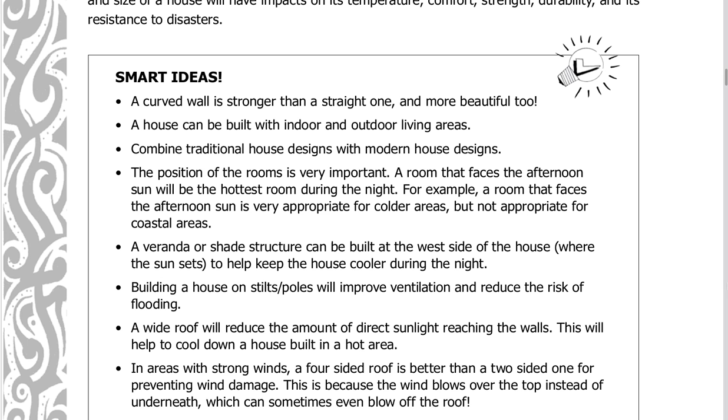Combine traditional house designs with modern house designs. The position of the rooms is very important. A room that faces the afternoon sun will be the hottest room during the night. For example, a room that faces the afternoon sun is very appropriate for colder areas, but not appropriate for coastal areas. A veranda or shade structure can be built at the west side of the house, where the sun sets, to help keep the house cooler during the night.

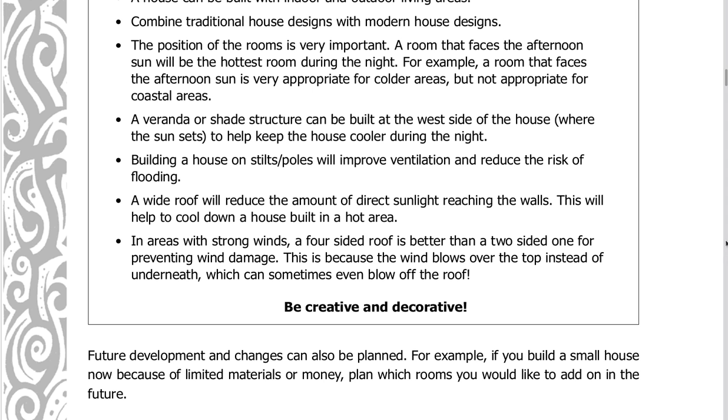Building a house on stilts, poles, will improve ventilation and reduce the risk of flooding. A wide roof will reduce the amount of direct sunlight reaching the walls. This will help to cool down a house built in a hot area. In areas with strong winds, a four-sided roof is better than a two-sided one for preventing wind damage. This is because the wind blows over the top instead of underneath, which can sometimes even blow off the roof.

Be creative and decorative. Future development and changes can also be planned. For example, if you build a small house now because of limited materials or money, plan which rooms you would like to add on in the future.

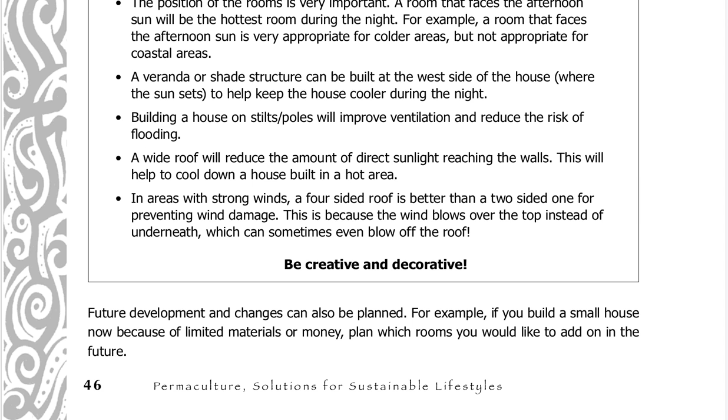Building materials. The most common building materials used are wood, plywood, bamboo, grass thatch, brick, cement, and tin. These are widely known and need no explanation of how to use them. Bamboo, clay, stone, and other traditional building materials have been used for a very long time and are good building materials if used properly. Some simple ideas and techniques on how to use them will be explained in this book.

Clay. If built properly, a clay, mud brick, or clay brick walled house can last for a very long time. In some countries, there are clay or mud brick houses that are 100 to 200 years old or more. There are many areas that have good clay for making mud bricks or building clay walls.

Clay houses stay much cooler in hot climates than do cement block houses, but good ventilation is still very important. Clay walls store heat throughout the day. At night, clay walls will slowly release this stored heat and help to keep the house warm. Clay houses are very suitable for areas that get colder at night.

Clay walls are made using clay, water, and some dry grass. Mix all the materials together, then start building at the base and slowly build up. Clay is more commonly used to make bricks.

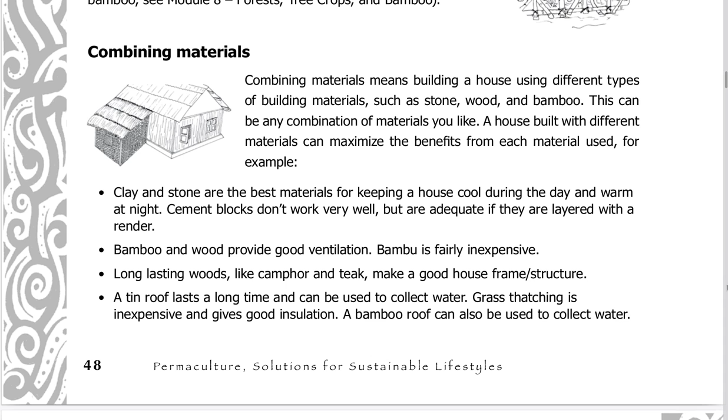Long-lasting woods, like camphor and teak, make a good house frame structure. A tin roof lasts a long time and can be used to collect water. Grass thatching is inexpensive and gives good insulation. A bamboo roof can also be used to collect water.

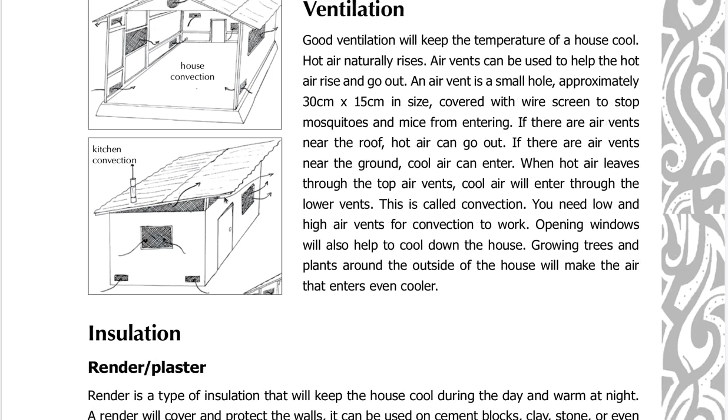Ideas for house improvement. See house convection, kitchen convection. These ideas can be used for building a new house or renovating an already existing house. Simple, inexpensive improvements can make a big difference to the living area.

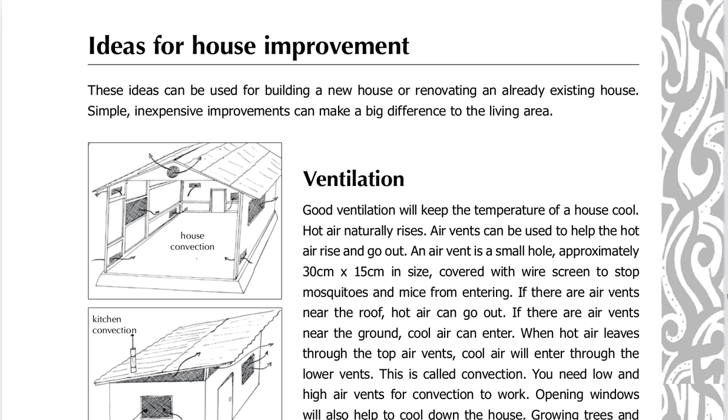Ventilation: good ventilation will keep the temperature of a house cool. Hot air naturally rises. Air vents can be used to help the hot air rise and go out. An air vent is a small hole, approximately 30 centimeters by 15 centimeters in size, covered with wire screen to stop mosquitoes and mice from entering.

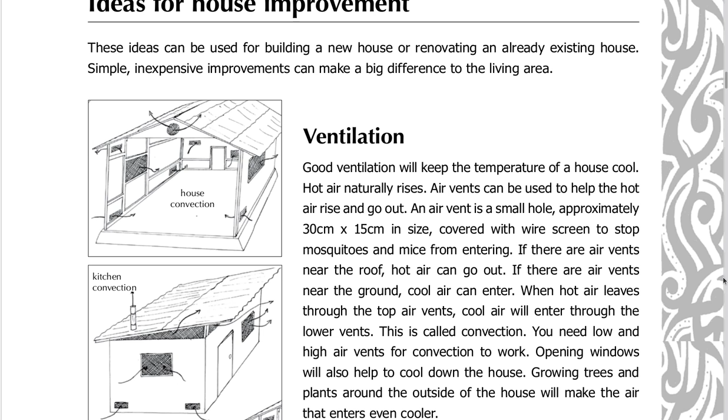If there are air vents near the roof, hot air can go out. If there are air vents near the ground, cool air can enter. When hot air leaves through the top air vents, cool air will enter through the lower vents. This is called convection. You need low and high air vents for convection to work.

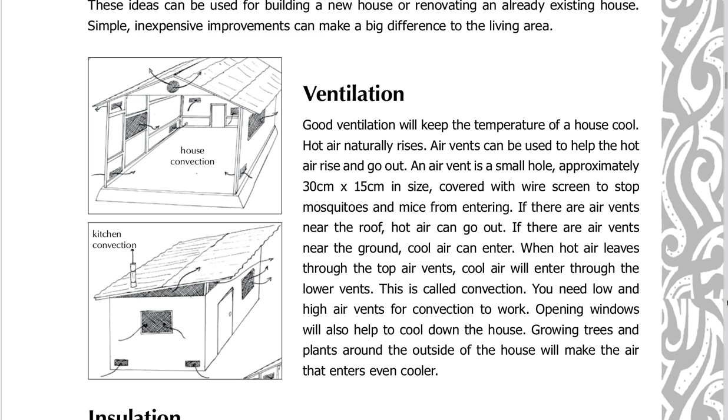Opening windows will also help to cool down the house. Growing trees and plants around the outside of the house will make the air that enters even cooler.

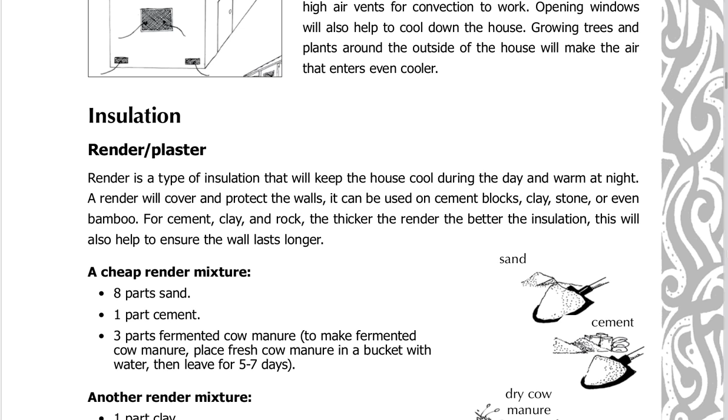Insulation: render, plaster. Render is a type of insulation that will keep the house cool during the day and warm at night. A render will cover and protect the walls. It can be used on cement blocks, clay, stone, or even bamboo. For cement, clay, and rock, the thicker the render, the better the insulation, which also helps ensure the wall lasts longer.

Sand, cement, dry cow manure. A cheap render mixture: 8 parts sand, 1 part cement, 3 parts fermented cow manure. To make fermented cow manure, place fresh cow manure in a bucket with water, then leave for 5 to 7 days. Another render mixture: 1 part clay, 4 parts sand, 5 parts fresh cow manure.

Hydrated lime, add water as needed. Cow manure helps to seal the render and protect it from insects, and it doesn't smell once it is dry. The lime helps protect the walls from rain damage and acts as an insect repellent. Remember, this is from Indonesia.

Render for bamboo and gedeg, woven bamboo walls. This method works very well in colder areas. The process: first, cover the split bamboo gedeg with chicken wire on the outside and inside. This will hold the render in place. Rendering both sides of the bamboo gedeg will help protect it from insects and make the material last longer while providing insulation. Second, apply the render until the wall is covered, until you cannot see the chicken wire or bamboo gedeg. The thicker the better.

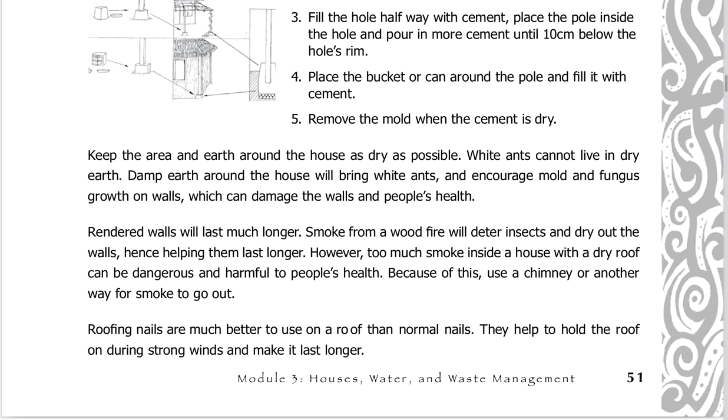Roofing nails are much better to use on a roof than normal nails. They help to hold the roof on during strong winds and make it last longer.

Insect screens. Mosquitoes carry many diseases. The risk of disease can be reduced by screening all windows and openings of a house. Use mosquito netting over beds for protection during the night.

Outside improvements. Pergola shade structure. A pergola or shade structure can be made large or small. This structure is simple to make and it provides shade for the outside living area, while keeping the house cooler inside. Different types of vines can be grown on the pergola, including passion fruit and grapes. Palm leaf can be used to cover the structure and provide shade until the vines grow over it. Pergolas can also be used to shade plant nurseries.

Trees and windbreaks. Trees provide shade, protection from strong winds, and keep the house cooler because of moisture in their leaves. Smart ideas: in hot areas, a pergola shade structure can be built or trees can be planted at the west side of the house where the sun sets. This will help to keep the house much cooler during the night.

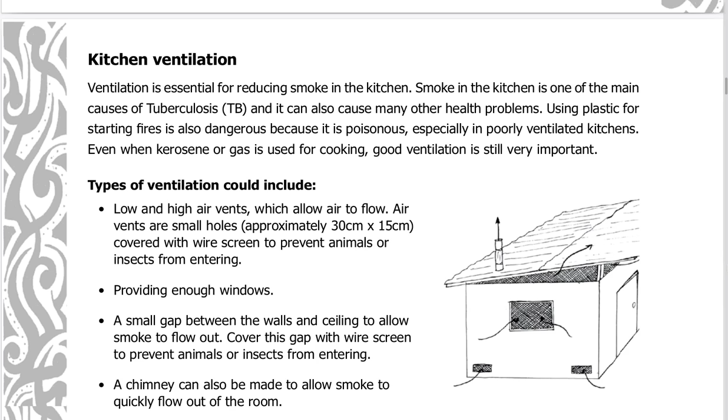Types of ventilation could include low and high air vents, which allow air to flow. Air vents are small holes, approximately 30 centimeters by 15 centimeters, covered with wire screen to prevent animals or insects from entering. Providing enough windows is also important.

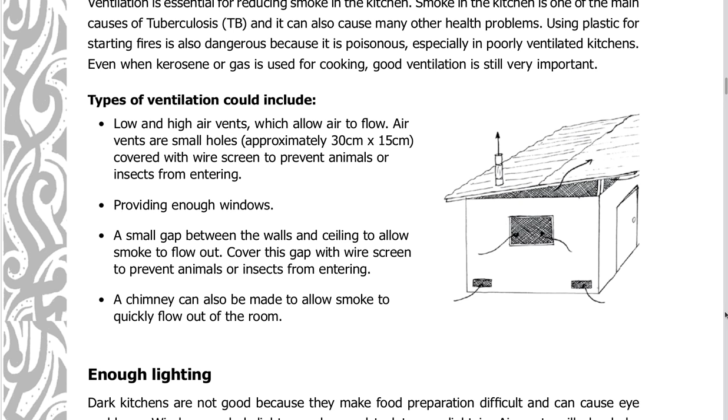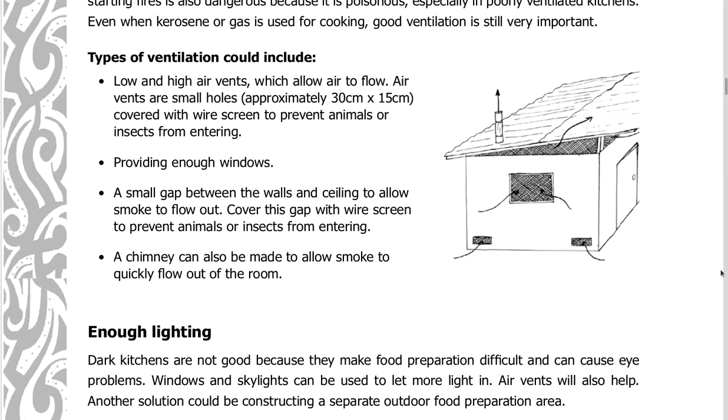A small gap between the walls and ceiling allows smoke to flow out. Cover this gap with wire screen to prevent animals or insects from entering. A chimney can also be made to allow smoke to quickly flow out of the room.